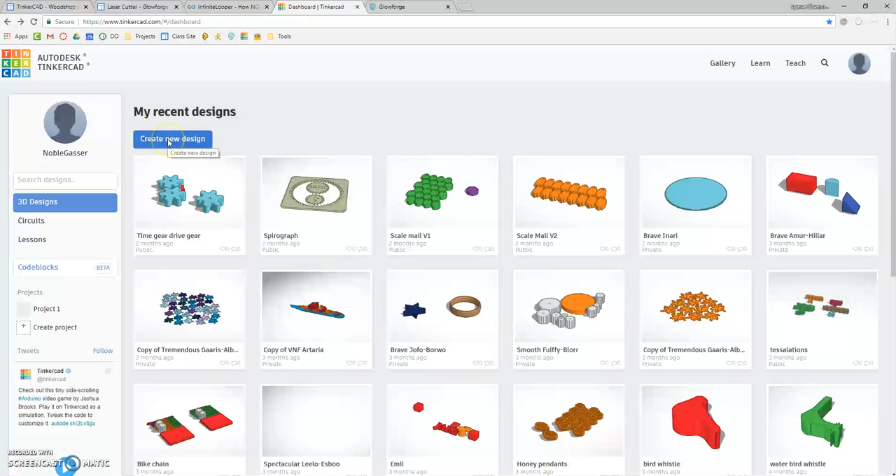If we jump over here, you might want to play around with this a little bit, and after watching that first little video I've posted on the website, we're going to design a name tag as our first little project here.

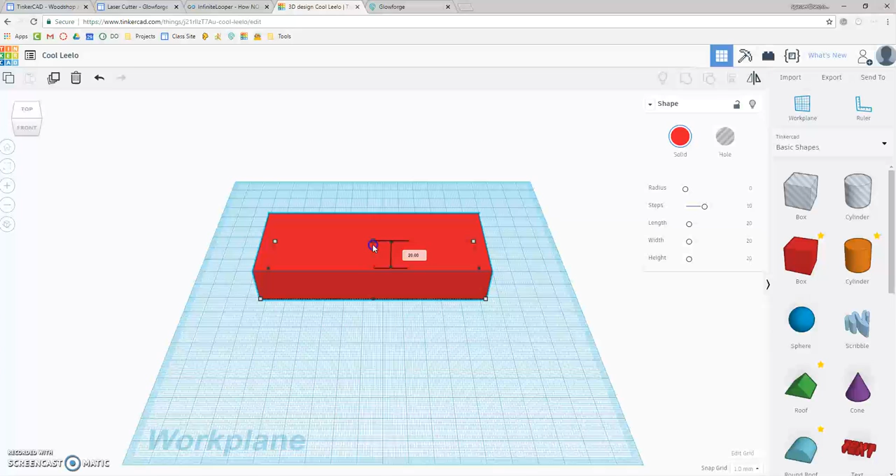I'm going to start off with the background, the size of the name tag I want it to be. I want to make this a little thinner just to make it easier to look at, and I'm going to look at it just from the top. If I click on this, it makes me look straight down from the top here.

And I can add some text. Maybe I want this to say Gasser.

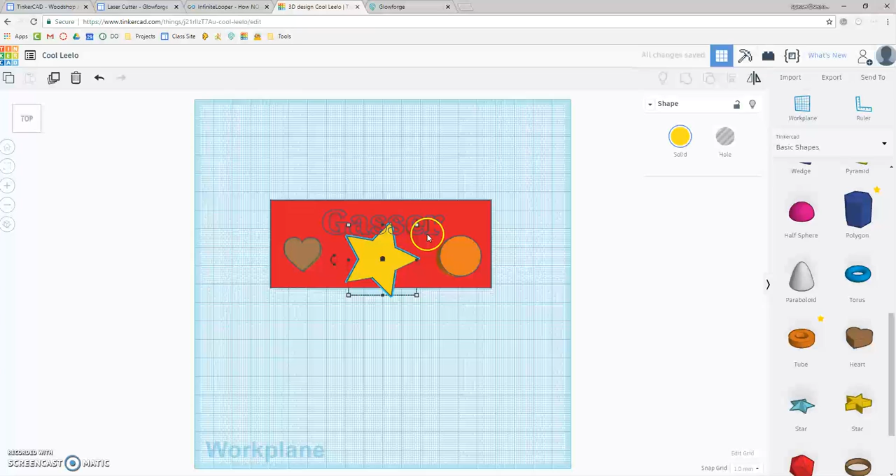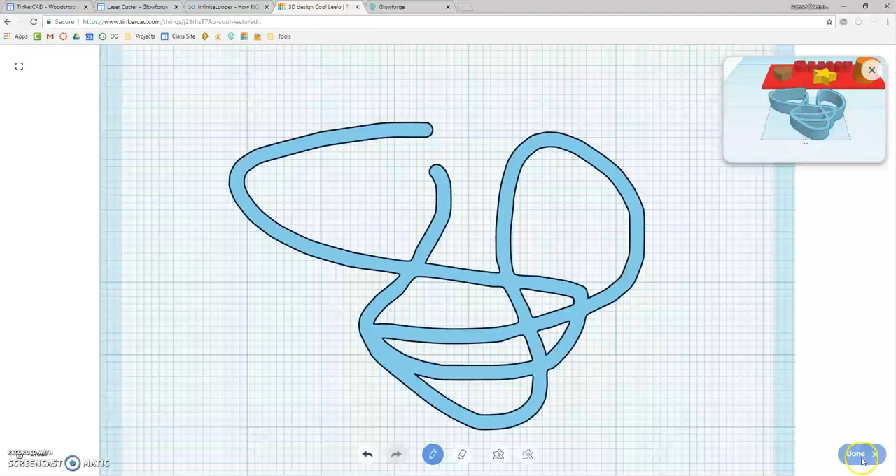So I just threw a couple of things on there. I like those designs. You can also try this scribble tool, which is fun, which will allow you to just draw whatever you want. You have a couple controls down here you can play with to see what looks good to you, and then going back to top view again, maybe I can put that in my design somewhere.

Maybe right there. So now I have this.

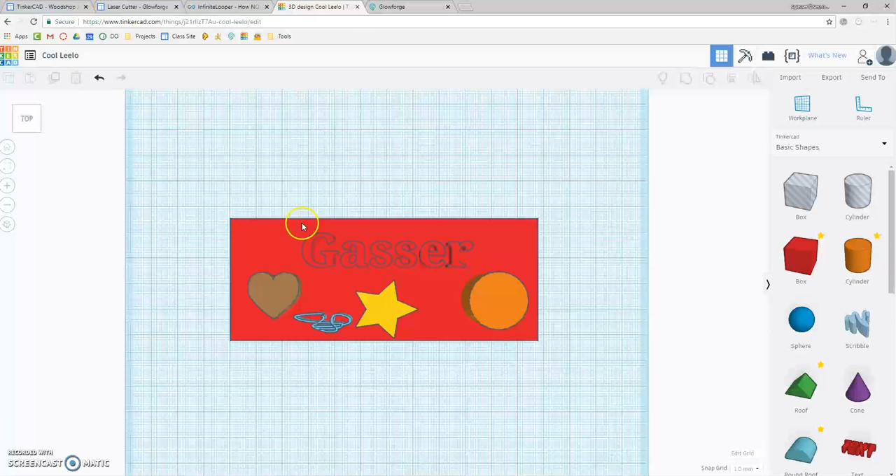What we're going to actually do is export this twice. Now I have my background, and I have all my pieces that are on the surface there, and they fit inside each other. All the pieces fit inside the piece of wood I'm going to cut out here. The background doesn't have to be square or a rectangle, it can be any shape you want.

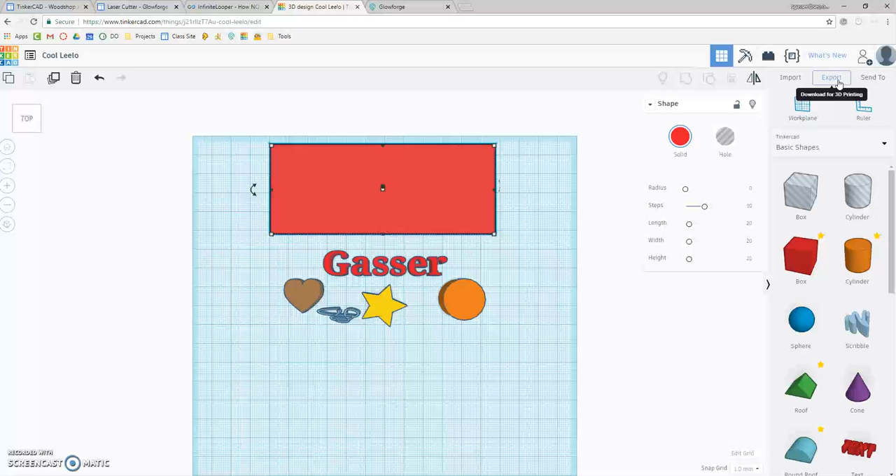So I'm going to move that away for a second, and I'm going to say export with just this selected - I see the boxes around there. I'm going to say export for laser cutter here. Now this is going to save on your Chromebooks to your Google Drive.

I'm on a PC right now, but when we pop over here to the Glowforge, you say add artwork, we're going to say upload, and that's going to be my file I have right there. That's going to put just the rectangle in the background there - just the rectangle is what I want to cut out.

So I'm going to do a cut on this. I'm going to be doing this on a thin sheet of plywood, so I'm going to put the cut settings in for that. That should be full power, and you should change the speed - the speed should be about 300 for the plywood that we're going to use.

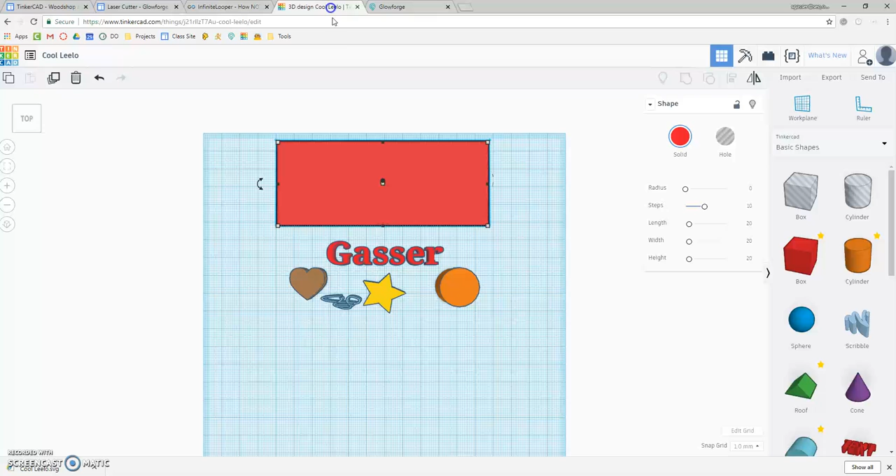And then if I pop back over here, now I'm going to select all my other stuff that I want and export that separately as an SVG for the laser cutter. Getting that file, now I can add it by saying upload, and it's the second one here with the little one by it.

Now this, I don't want this to cut all the way through - I want this to be a score. So now I can line this and put this in the center there. We don't want to cut all the way through, we want to say score. That means don't cut all the way through, just draw a line with the laser on the surface there.

So now that is looking good. We're going to have to come over here and select the material we're using. We are never going to use any of these - we're going to use uncertified material. You have to go and measure the thickness of that material and type that number in there as a decimal.

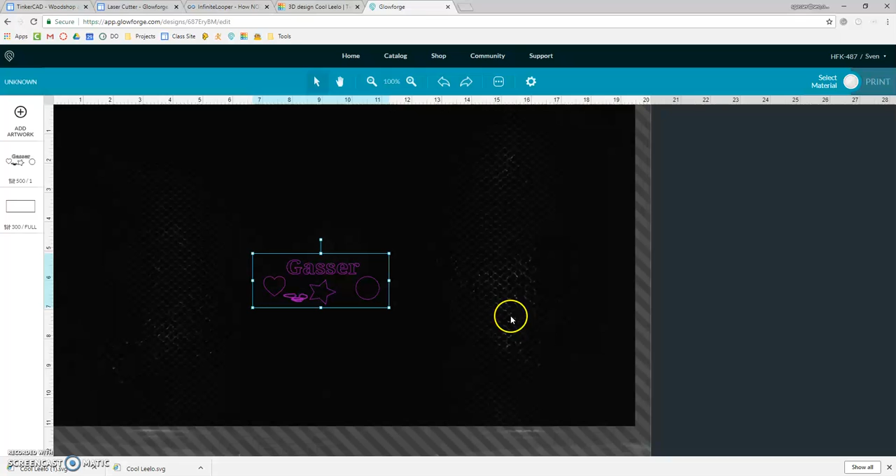After that, you put your material in here, put this where you want it to be on that material, and we're going to come over here and push print, and you are cutting something out on the laser. First project. Woo! All right. Enjoy. Bye.